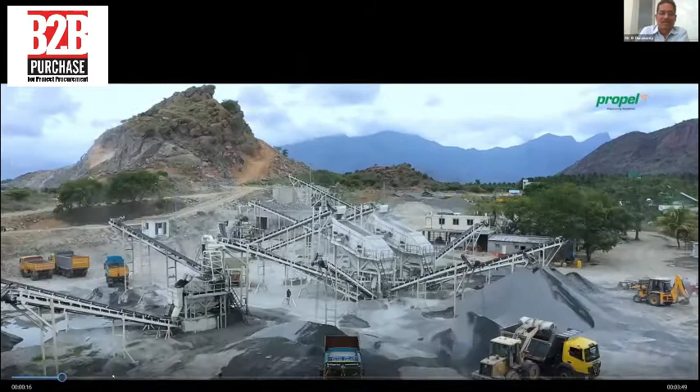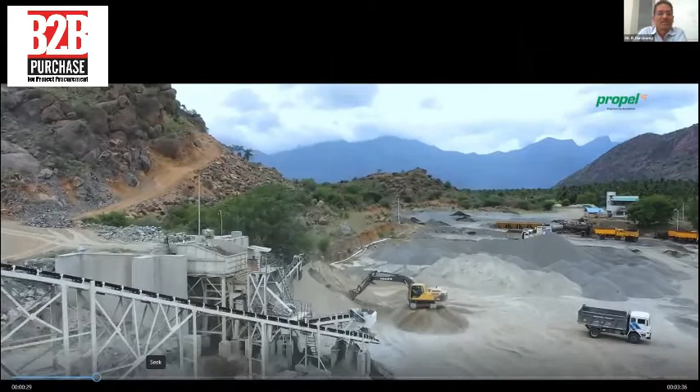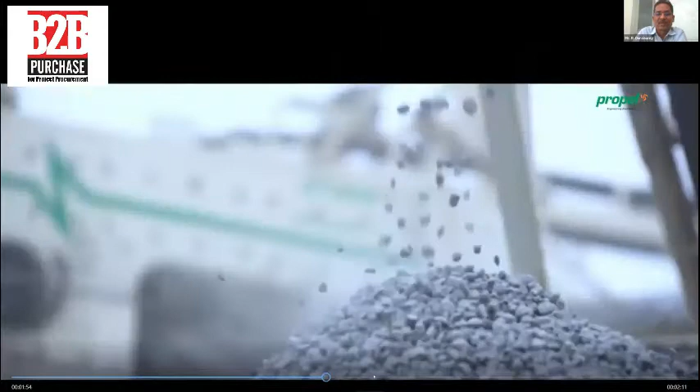Suppose you take a typical 250 TPH three-stage plant - it's just a small video, it looks like this. This is a conventional three-stage plant with a stockpile. You can see it's a 250 TPH plant. Stockpile is there, then we can see cone and VSI, followed by a washing machine, which produces your washed M-sand and P-sand.

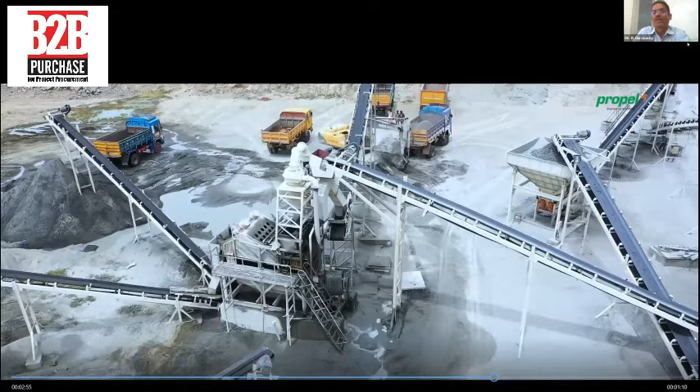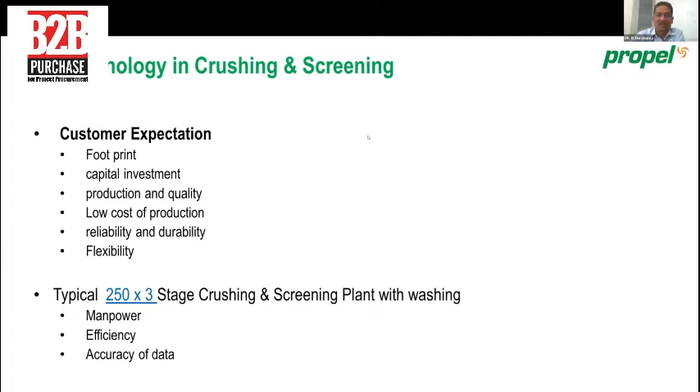Basically, what happens in this type of plant is it's all manpower dependent. Every stage - jaw crusher station, primary station, secondary station, tertiary station - is manned by a trained person who ensures the efficiency of the machine. He has to be careful in ensuring that the machine is choke fed and runs continuously, controlling the feeder parameters. Sometimes this drops because it depends on the manpower, who can be brisk or can get tired - based on that, the efficiency drops, and also the accuracy of data goes down.

So what is the solution? For example, this very compact layout - we have already come out with a very compact layout which saves nearly 30% of space.

You can see this is the before. This is a typical layout. The next layout is this one.

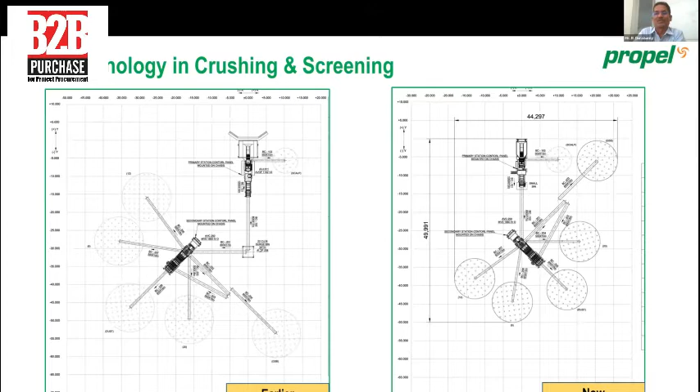What happened? We eliminated the surge bin and pan feeder. The cost comes down, and with the help of automation we are able to ensure the machines are fully utilized. Manpower dependency is reduced, and automation helps you run the machines efficiently, giving the best possible production and quality.

So this is the automation, and apart from that, there are apps, by which the dependency on manpower is totally reduced. We have also developed an app so that if a customer wants M-Sand, he just goes into the app and clicks it. Immediately the order comes to the concerned crusher, then it moves to production, to the delivery department, and to the payment accounts. All of that is app based.

Even the truck that comes for loading is controlled and recorded, and the whole cycle from ordering to delivery is controlled. Even the transportation price is calculated based on the distance from where you are. This kind of automation really helps improve industry performance and reduces the owner's dependency on people, because the owner can just sit anywhere and watch on his mobile what is happening.

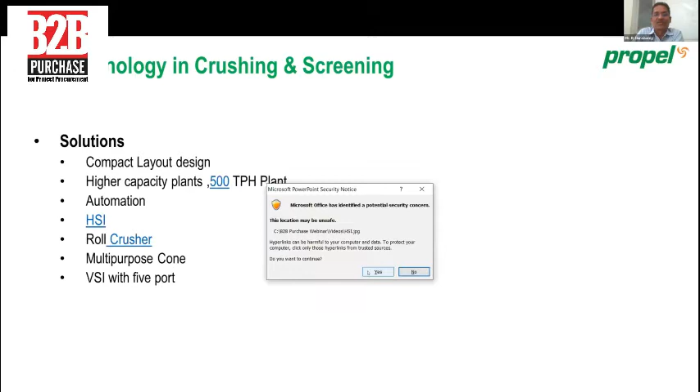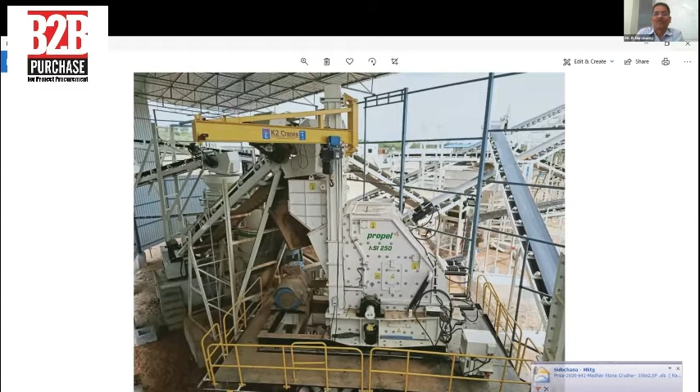We also recently introduced the HSI machine, which is specifically used on some kinds of rocks, mainly softer rocks, to produce more sand with better quality and better production.

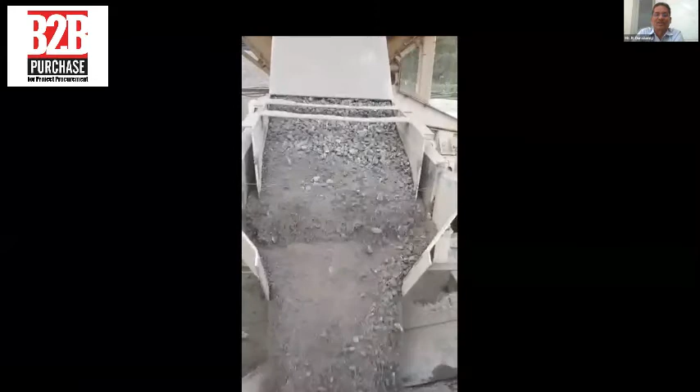We have also come out with a roll crusher, which helps produce very high quantity of sand with better quality. We have already tested it successfully. This is the roll crusher.

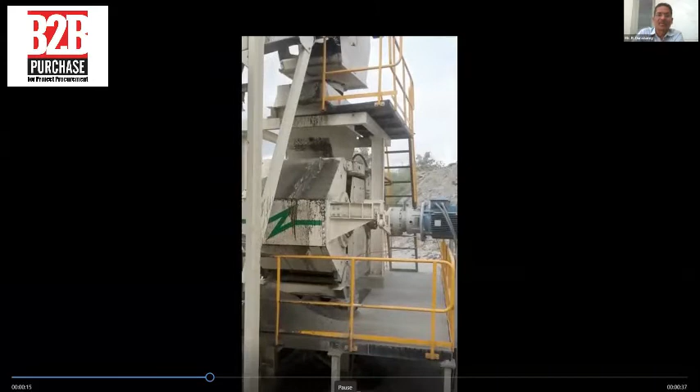Then the multi-purpose cone. We have made the machines very flexible. Within 5 to 6 hours, you can convert this machine from a normal machine to a sander, which predominantly produces sand, and then convert it back. This gives flexibility for the customer, the same machine, only by changing a few parts, which can be done in 5 to 6 hours.

We are also trying to launch, and have already launched, VSI with 5-port, which helps produce a higher quantity of sand with better quality.

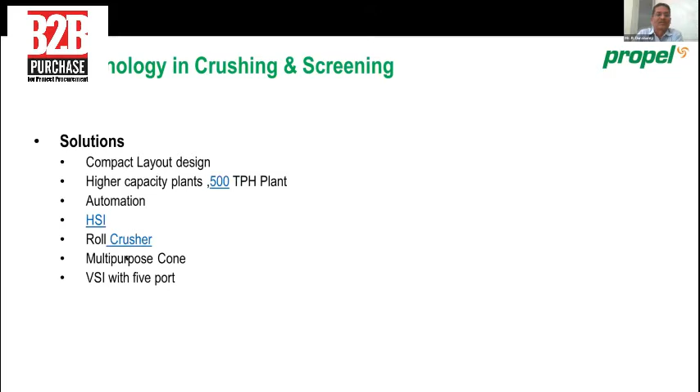These are some of the machines we produce. In the track plants, we have come out with unique technology where they are all dual powered, meaning most systems except the track are electrically powered. This improves efficiency and fuel consumption, helping improve carbon output, since the engine runs very effectively and saves fuel.

We have come out with jaw crusher, cone crusher, and VSI. We are the only company that has come out with even VSI on track—few companies produce VSI on track. This helps save energy and fuel. This machine is now successfully working.

Apart from that, we have made a vibrating screen on track—first time in the world, a 4-deck machine, size 1861, that is 1.8 meters by 6.1 meters. We are able to come out with this new machine, which really helps the field produce 4 products successfully.

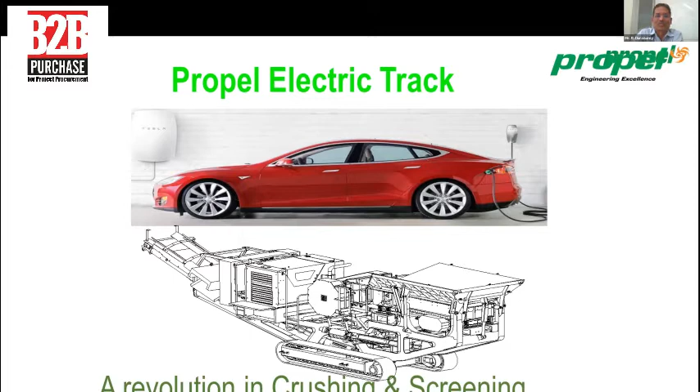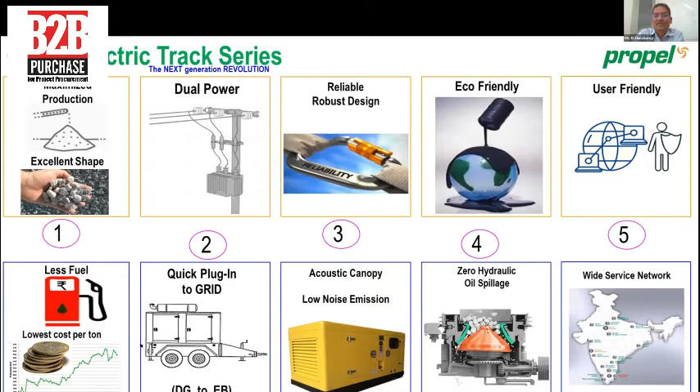As I said, we are focused on production and dual power. Reliability is addressed, it's eco-friendly as I told you, with lesser fuel consumption, and it can easily be switched from DG to EB and EB to DG. Wherever EB is available, we can just plug in the power and run these machines. So we can call these green track machines, and even the cone crusher runs on motor power.

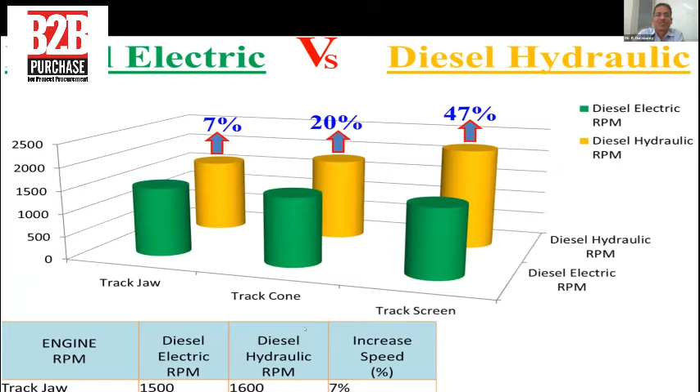As I said, what is the amount of diesel saving with this dual powered track versus the hydraulic powered tracks? This is like a typical track plant.

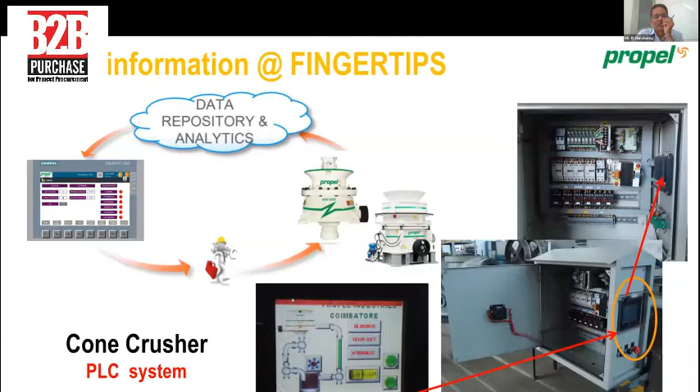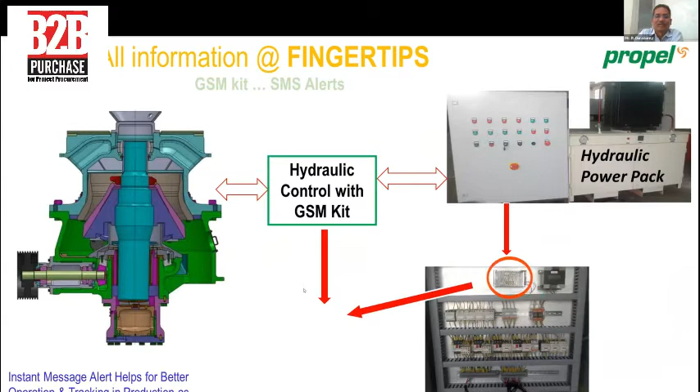Apart from that, on the automation side, we have done a lot of things. Every parameter is monitored by electronics, which helps you run the machine productively, like CSS automation, ensuring the machine's level sensor runs in choke feeding.

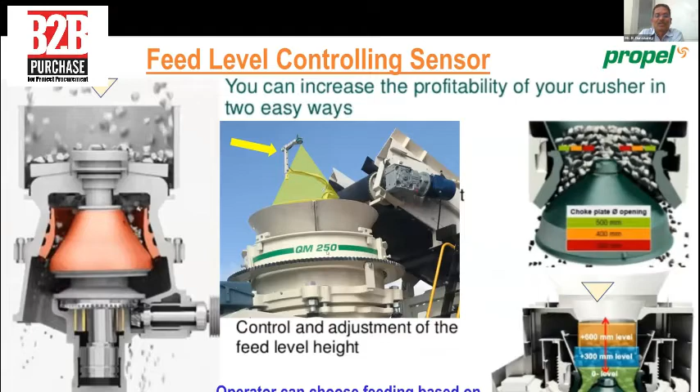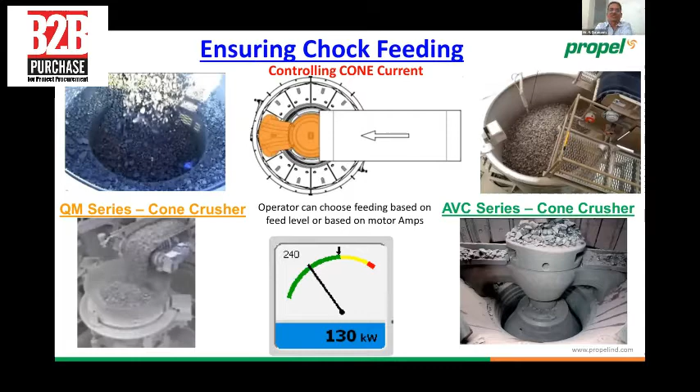These are some of the things which we have done, and because of the time constraint, I'm concluding it here.

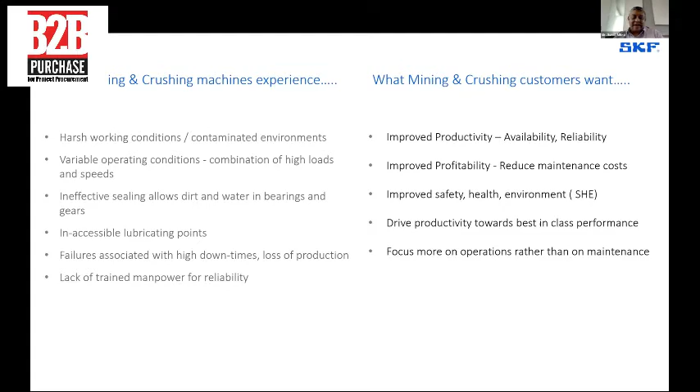So how do you look at equipment, and why is this so critical for the mining segment in particular? Because you have very expensive machinery and your cost of downtime is also extremely high. Whether it's mobile, standalone, a stacker reclaimer, a small excavator, or even conveyor systems, the costs of all of this have a very high business impact in terms of profitability for the customer.

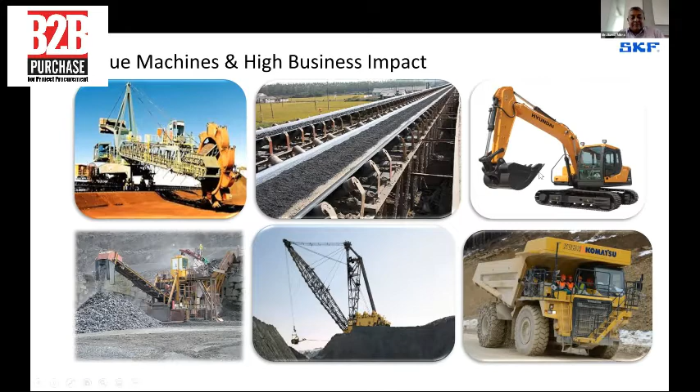How do we give this solution? I'm talking more on the digital side rather than the mechanical side. If you look at the equipment, there are multiple parameters that you monitor. One is the operational data, in terms of running time, uptime, and how much you're crushing. The second is vibration data, done through mounted sensors. But there are other process parameters too, like speed, displacement, torque, electric current, etc. What we have here is all of this data now needs to be put into a cloud.

And why this is critical is because it is impossible to have this kind of diagnostic capability at every mining location or at every single equipment. By putting it on the cloud, what it ensures is that you have a central processing capability where you have trained engineers looking at the data and are able to give you meaningful decisions.

That does not mean that you don't get the basic data at the site. So for example, if a vibration is going beyond the limit or if temperature is going too high, of course you will see it, and typically the automation systems that already exist take care of it. But really, if you look at vibration and you think what vibration is, you need to think about it more like an ECG of the heart.

So just like a cardiologist is able to see your heart pattern and be able to predict a problem that is coming, even if you don't think there's a problem right now, that is exactly what our remote diagnostic center of condition monitoring does. So essentially there we are able to process this data and we are able to provide meaningful dashboards, diagnostics, advanced tools, in case we, based on the data that is coming in, think that some changes need to be done.

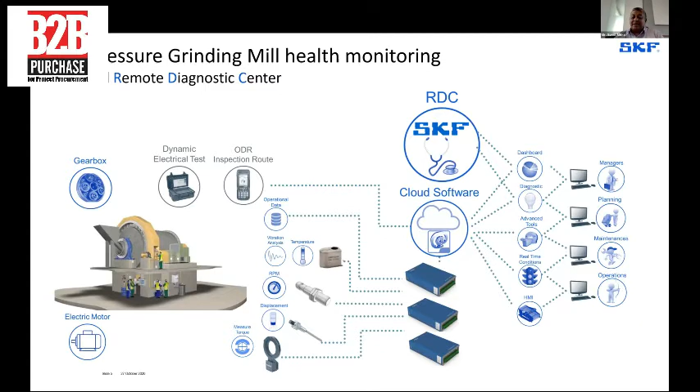We suggest that either in terms of repairs, or it may be even larger, in terms of, say, because of recurring failures, we would recommend a change in design, maybe in housing, a different sealing solution, etc. And this data would be available to the customers, to the managers, to the planning teams, to the maintenance team, and ops teams, different data depending on who needs to see what.

I would just like to dwell a little on what exactly a remote diagnostic center does. So it first of all captures all the process data that is coming into the field. So that is vibration, lubrication, temperature. Then there is inspection data.

Now this data may come not necessarily through sensors, but through what we call operator driven reliability. So the operator is the person who's always closest to the machine, and we can set up a way where they can monitor what is happening. For example, there's a looseness somewhere, or there is excessive vibration in the foundation, etc. And they can put those data in, or a nut is getting loose somewhere.

And third is, of course, the things related to operating conditions, whether it is running hours, whether it is load, and all the rest. Now, this data is also available for people who are at the site, or sometimes it is influenced by people who are at site, which is typically the automation systems that are existing at site.

Now, the RDC cloud is what is accessed by SKF engineers. SKF engineers are people who are trained in understanding or making sense of all of this data and trying to come up with meaningful suggestions.

Of course, they don't do all of it themselves, but currently we have very powerful diagnostic softwares, and we are currently developing a very powerful set of artificial intelligence tools which will be able to do this automatically. In fact, SKF has recently acquired an Israeli artificial intelligence company, and that is what we are doing.

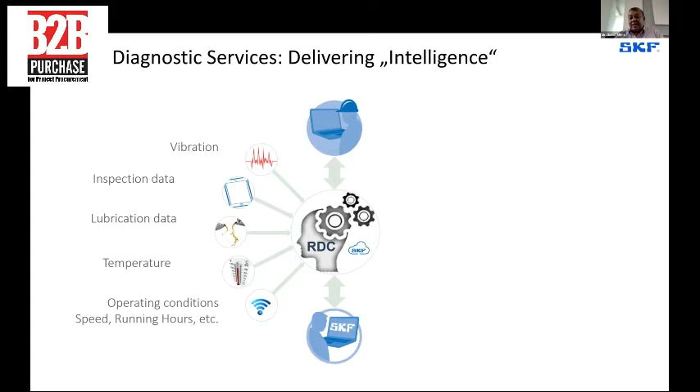All this data is mined, and meaningful information is created out of that. So then we can share the intelligence with the customer, with of course the SKF team who's supporting the customer, and this enables a complete information exchange between SKF and the customer.

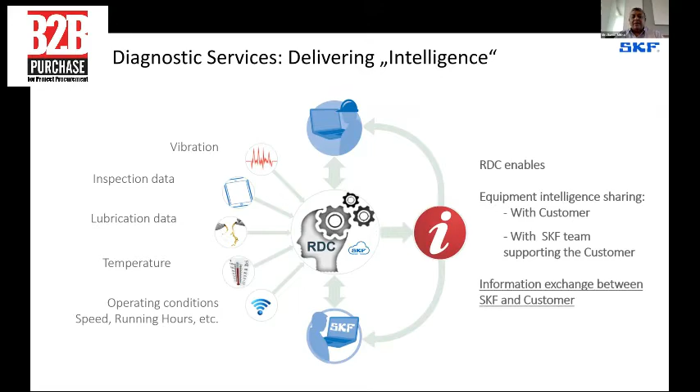Now, while all of this sounds very fanciful and doable, there has to be an end goal to this, and only having reliability as an end goal would not be sufficient. What we are trying to do is to take this one level further, and we are now driving a motto to our customers saying we will deliver zero surprise failures.

Now, what does zero surprise failures mean? As any engineer knows, there is an MTBF, there is an MTTR, and no equipment can never fail. It is about what actions you take to prolong the failure, or how you take proactive actions or plan for them, so that you make the necessary changes in the equipment in terms of changing components, so that the failure doesn't happen as a surprise. So that is really what we focus on in terms of zero surprise failure.

So from a customer perspective, what we do is we take the data, we do the diagnostics, we decide what are the actions to be done.

In case of planned replacements, we ensure that the bearings are stocked either at our warehouse or with our distributors. They get delivered to site, and if required, we can also come and install the bearing on the equipment, so we can give you the full value chain. This is not just about selling a product or a digital solution, but giving you the full value chain. From the customer perspective, they are looking at a reduced overall cost per ton.

A significantly extended bearing life because of early monitoring. Because, like the ECG of the heart, if you can measure things early, you can take corrective actions and prolong failures of equipment. This significantly reduces spends on maintenance operations and increases reliability and productivity.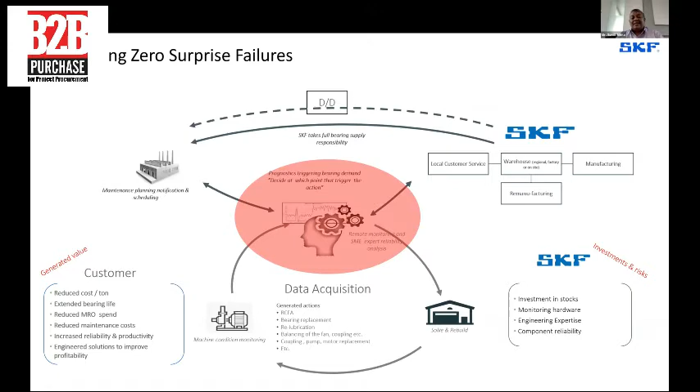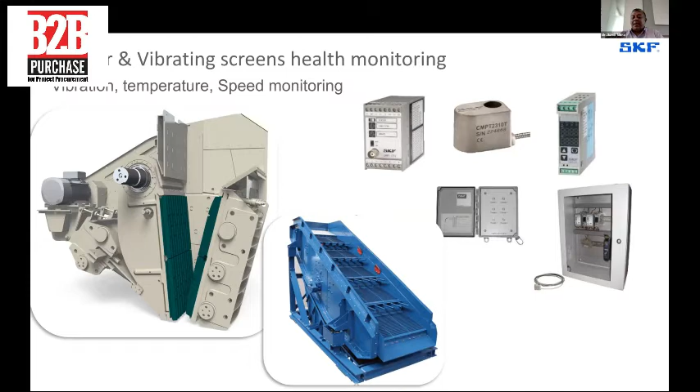I will end with a couple of examples because of dearth of time. This one is for crusher and vibrating screen. It's important to understand that whenever we talk about mining equipment like crushers and vibrating screens, while we measure vibrations, there's an inherent very high level of vibration. So you need specialized equipment for that, and those kinds of sensors are available with us, along with complete enclosures which ensure that the electronic equipment also works in a very aggressive environment.

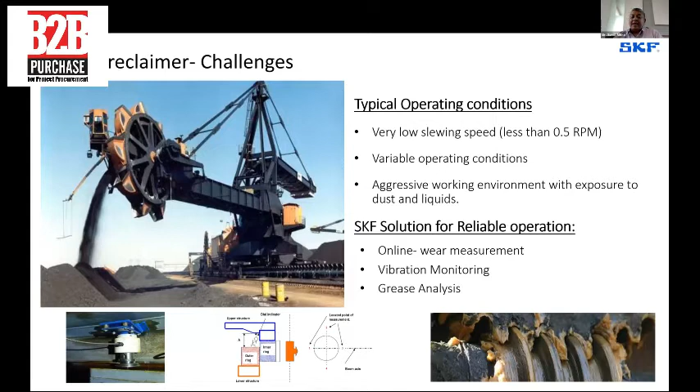This is another big challenge typically there in mining operations, related to a stacker reclaimer. Typically, stacker reclaimer has issues related to low speeds. It also has a lot of operating condition issues, including dust. We are able to do the complete monitoring and provide solutions around that.

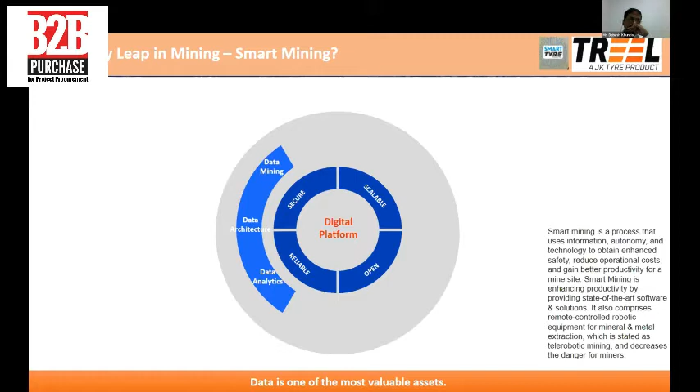My topic is how technology advancements in mining equipment are going to demand from the OTR tire manufacturers. As already stated, the global mining industry is under tremendous pressure, and mining has always been very dynamic. Currently mining is undergoing a lot of pressure because of falling commodity prices, and at the same time a lot of environmental concerns are being raised. So now the most challenging point for miners is how this mining can be sustainable in the long term. To have sustainable mining, I can talk about economic sustainability or social sustainability—these are two things where miners are already working—and the third most important thing is ecological sustainability. So how are miners making their mining sustainable? Technology is going to facilitate making this mining sustainable, and innovation is going to be the key.

Innovation can be formal or informal, like Jugaad technologies, which is available abundantly in India. So innovation is going to be key in sustaining mining.

So today, if you talk about mining companies, what are their priorities? How do they see mining future, how it's going to take shape, and how they'll work on future mining? The topmost thing is safe mining. They want to mine safe first. They want their people to be safe, their machines to be safe, and their material to be safe.

So technology is going to help them, and they are banking on a digital platform, creating more and more data, simulating situations, and that can enable them to create a very safe mining environment.

The second most important thing miners are focusing on is lean mining. Lean mining is basically improving productivity - for every ton of ore they mine, what is the amount of waste they create. So they focus on how they can be lean, creating less waste and more ore, and how technology and digital platforms will enable them to achieve it.

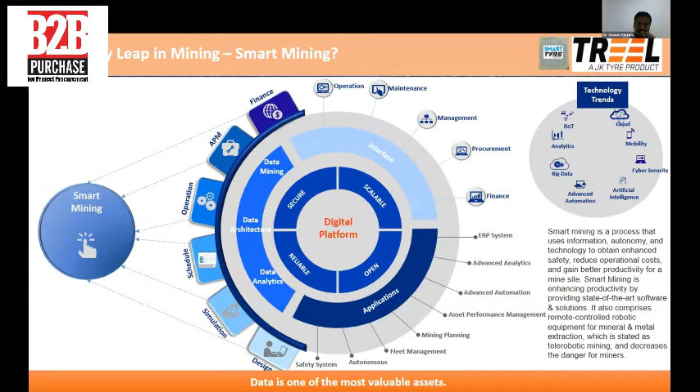So to meet the demands of smart miners, as a tire supplier and tire manufacturer, we are slowly gearing up and doing our bit to service and support them in the coming times.

We have today come out with tire pressure and temperature monitoring systems, where the performance of the tires can be tracked 24 by 7, and with this system they improve their safety and productivity.

And at the last Auto Expo in 2020, beginning of January, we released our smart tires, the sensor-enabled tires, where customers can, instead of buying an ordinary tire, buy smart tires which communicate with their machines. This generates a lot of data, and based on that data they can work on further improvements or increasing efficiency.

We have indigenously developed sensors, manufactured by a company in Pune, called Treel sensors. We have developed web applications for this too. Customers can purchase sensors, download the app from the Apple or Google stores, and immediately start using it.

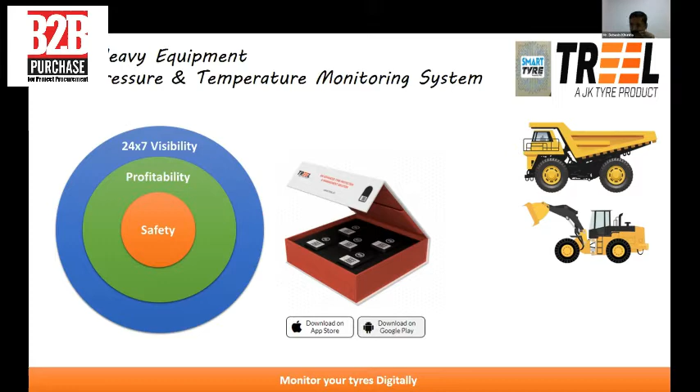So before I start talking about smart tires, let me tell a little bit about what a tire is and what its functions are. A tire is basically a thick rubber ring, often filled with air, fitted around the outer edge of the wheel of a vehicle, and that allows it to stick to the road and travel over the ground more easily.

So basically it's a round object filled with air, tied to your wheel rim. And what are the functions? The function is basically to absorb shock, transfer the traction and braking force to the surface, help in changing direction, and carry the load.

But actually, in pneumatic tires, the tire itself does not carry the load - it is the air inside which carries the load, right? So the amount of air, or the kind of pressure that I put into a tire, is very important.

Because as a designer, when I design a tire, I design it to a certain shape, and it has to flex to a designed level. But in operations, many times if the pressure is not right, it starts behaving differently, and once it behaves outside the design parameters, the chances of premature failures and premature removals increase.

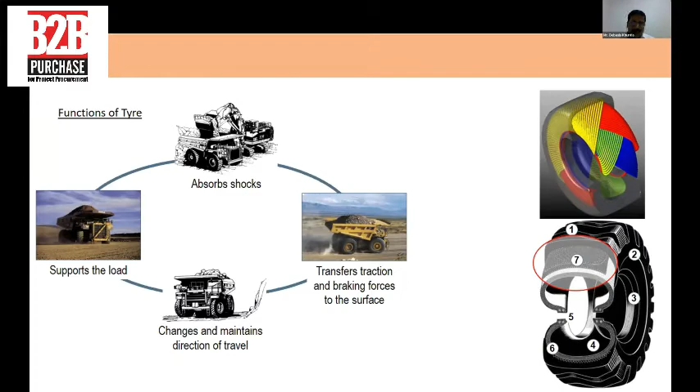This is why temperature is very important, because after giving a shape, we take the tire for curing, where tires are cured at a temperature of about 130 to 140 degrees centigrade. So in operations, if the temperature reaches close to the curing temperature, the tire components can disintegrate, compound reversions can take place, and your tires can fail.

So we have Treel, a TPMS system that can give you temperature and pressure readings 24 by 7, and that can really help you minimize the cost of ownership of your assets, reducing downtime and the cost of mining.

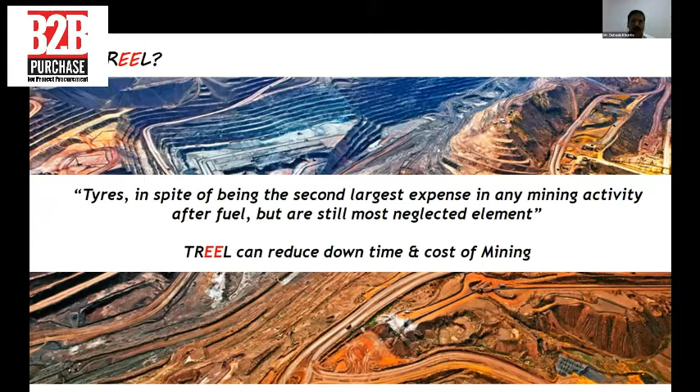And it's observed that in case of a 100-tonner truck, the average O&O cost, if I compare with the tire cost, comes to about 10% of your O&O cost.

The same thing increases substantially when going for bigger trucks, like your 240-tonner trucks. The same tire cost becomes 20% of O&O cost in case of a 240-tonner truck. So this tire pressure and temperature is very critical to measure and monitor on a daily basis.

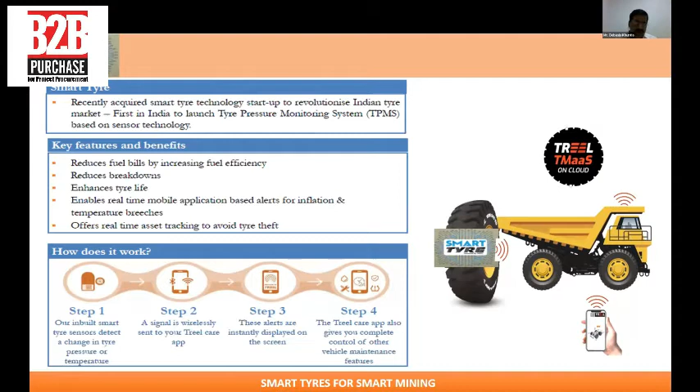Moreover, tire pressure checking is a matter of comfort for human beings. Sometimes your engineers or supervisors do not go to the site in the hot summer or on a rainy day to check and record the data correctly. If data is not available correctly, what kind of diagnosis will you make? So you have this TPMS system which you can monitor 24/7, record the data, and make your assessment or adjustments accordingly.

So how does this TPMS system work? We have sensors fitted to the tires, and you have a receiver mounted on the chassis of the machine, and a pod inside the driver's cabin. These sensors send signals to the receiver, the receiver sends signals to the pod, and the pod in turn, through GPS, communicates with the TMaaS on the cloud. So your data is stored on the cloud, and the same can be downloaded to your computer systems, and you have JK Connect, the analytical software tool, where the data will be downloaded and analyzed.

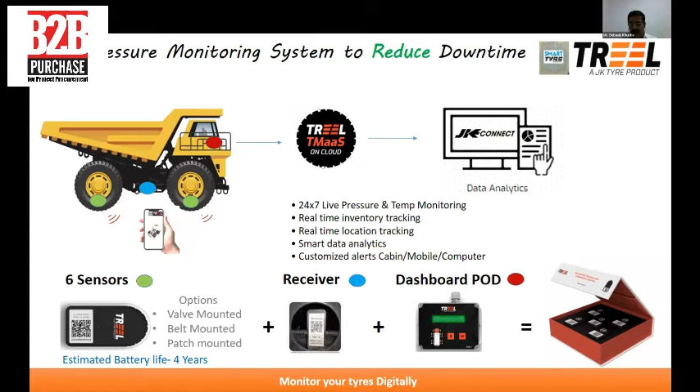So this is a very convenient tool available where the customer can fit smart tires, and they can monitor their tires round the clock.

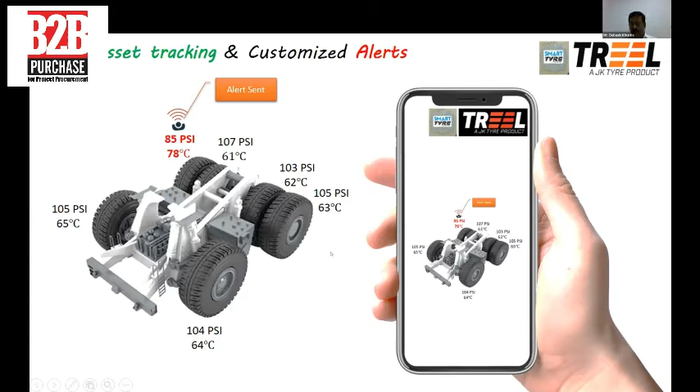This is how, in case, you can set alerts in your application, wherein if your temperature goes above 75 degrees centigrade, you can set an alert. It will send an alert to your mobile app or email, and you can call your truck to the bay and do the correction or adjustments.

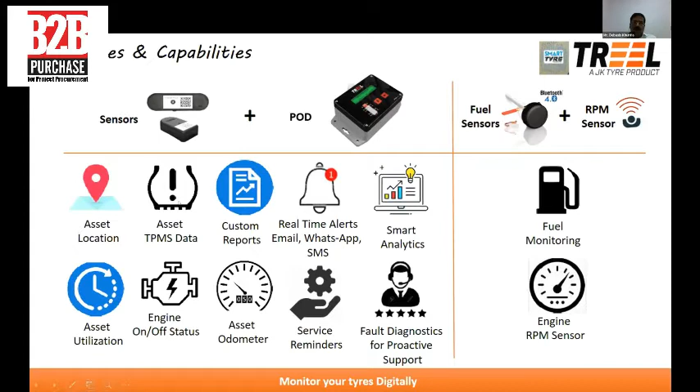Similarly, the software is available on the TMaaS web where the data can be analyzed. We not only integrate tire temperature and pressure sensors, but also fuel sensors, RPM sensors, engine off sensors, or asset utilization sensors. More sensors can be integrated, and those options are available on a customer request basis, and we can work on providing all the assistance in terms of this sensor technology to customers.